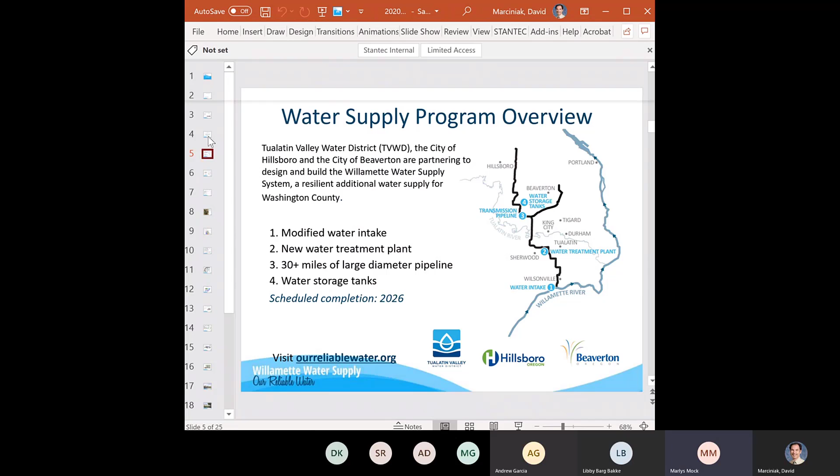So an overview of the system. At the bottom of the map, the number one modified water intake is in Wilsonville. That's where we're going to draw the water from the Willamette River. There's a new treatment plant being planned. That's the focus of our meeting tonight, just east of Sherwood, the number 2 on the map there. About 30 miles of large diameter pipeline, much of it 66-inch in diameter. And then 2 water storage tanks we're building on Cooper Mountain in general, about number 4 on the map, all to come online in 2026.

So the water treatment plant that we're talking about tonight is located within the Tonquin employment area in Sherwood. We're going to initially produce up to 60 million gallons per day with a full build-out capacity of 120 million gallons. Again, the water treatment plant will use the same water source that the Willamette River Water Treatment Plant in Wilsonville utilizes currently. And construction is anticipated to begin as early as next fall, running through 2025. And again, the system to come online in 2026.

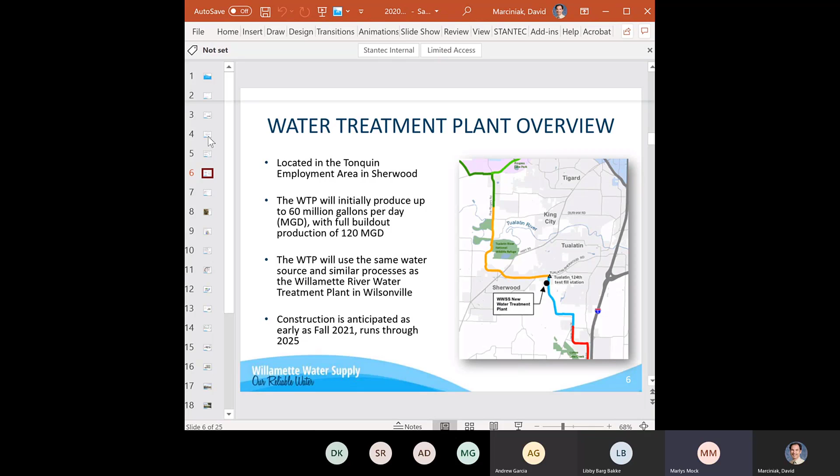So Matthew is going to take over some additional details of the project at this point. Matthew? Sure, thanks, Marlys. So I'm going to talk a little bit more about the water treatment plant site and the water treatment plant itself specifically. So the site's located at the corner of Southwest Tualatin-Sherwood Road and Southwest 124th, just on the east border of the city of Sherwood. The owners purchased some land there that totals about 98 acres, around 100 acres. The water treatment plant site will occupy the south part of that property.

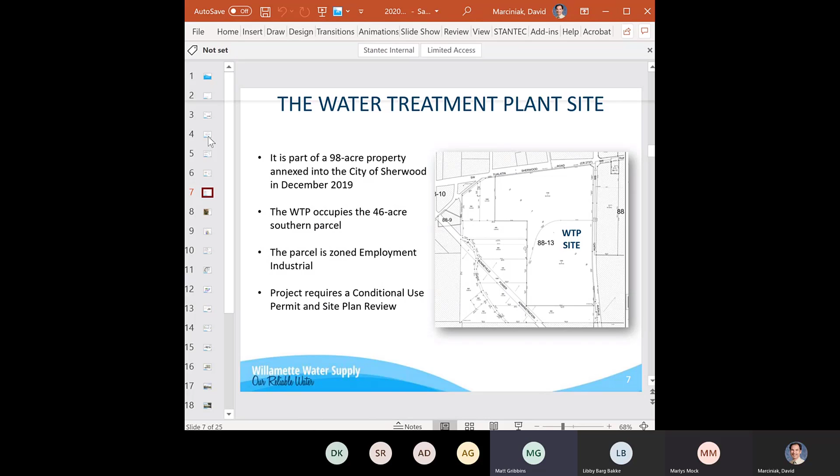We'll see it a little better on the next slide, but let me finish up here. So about half of that acreage will be allotted for the water treatment plant site. The area is zoned as employment industrial, so it's sort of more of an industrial area, and the project's subject to a conditional use permit and site plan review by the city of Sherwood, and this neighborhood meeting is part of that process for the land use permit.

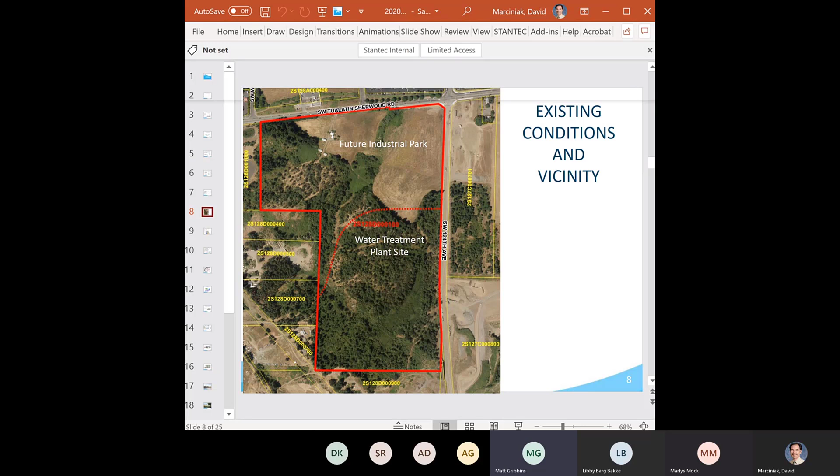Okay, next slide. This is a little bit more of a blow up of the area. The northern part of the site we are expecting to sell to light industrial, and there'll probably be some warehouses or something like that there. The water treatment plant will be on the south part of the site, the area just below the dashed line there. So we're just kind of south of that intersection of Tualatin-Sherwood Road and west of 124th Avenue. Next slide. The site, you can see here again, the northern partition that will be likely selling off.

We're conditioned to build part of Southwest Blake Street, which is the brown area that extends from Southwest 124th over to our west property line. You can see the water treatment plant in the white area just south of Blake Street.

There's some other features on the site. We have a PGE easement with high power lines that run across it in purple. There's an environmental wetland located in the southeast corner of the site that we're planning on preserving as part of the development. Then there's the blue area where we're going to have an area for the contractor to store materials and lay down things during construction, and then that area will be turned into a gravel storage area after construction for operations of the water plant.

We're pretty much staying out of the southeast corner of the site where the wetland is located, and the red and yellow areas are kind of isolated from the plant site. So other than the improvements we're going to do along Southwest 124th, we will really not be doing much in the southeast corner of the site, retaining it as sort of the native look.

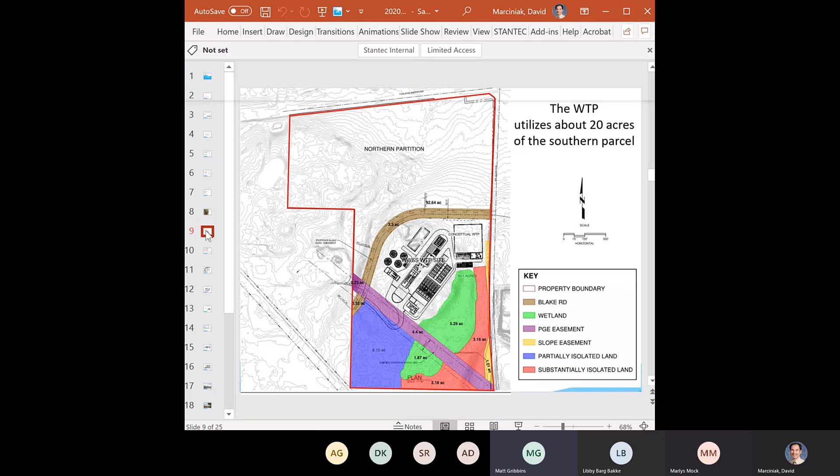The reasons we chose this site are primarily related to the adjacency to our water pipeline. It actually runs down Southwest 124th and then turns and runs west on Tualatin-Sherwood Road, so it's in close proximity to the pipeline that'll feed the plant and the pipeline that'll take water from the plant. Also, it's a site with a lot of rock, which is really stable for water plant construction. One of the goals of the program is to make this a resilient water supply that'll withstand an earthquake, so it's important to us that it be founded on good stable rock, and that's one of the attributes of this site.

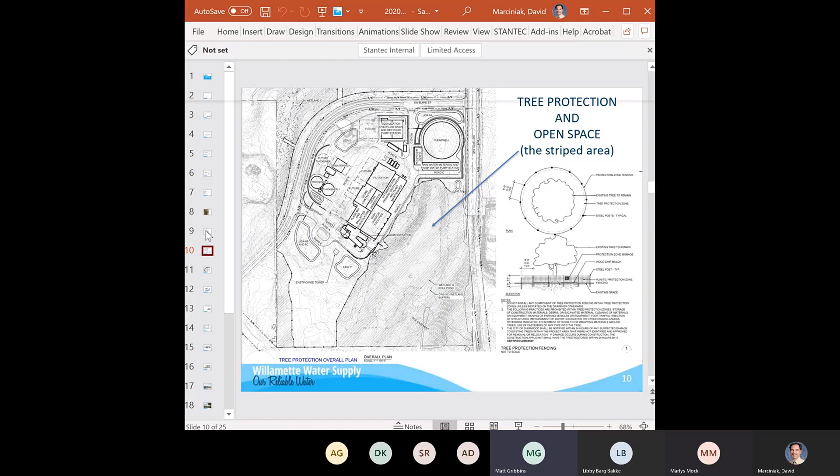This slide shows again the water treatment plant, a little more current version of the layout, but essentially in the same area. In the lower right-hand corner we're showing the preserved area where that wetland is located, and also some buffer zones on the west side of the site to buffer it from adjoining properties. It doesn't show it here, but we're also providing a buffer at the south end of the storage and laydown area I talked about before.

Next slide. Okay, so this is the blow up of the water treatment plant site. Like I said, our pipeline comes up from the south along Southwest 124th and will enter into the site on the east side.

Actually, can you go back to the previous slide? Just a couple other things. So again, you can see Blake Street here. It sort of borders the water treatment plant site on the north and west side.

We'll have a connection into Southwest 124th Street, shown in the upper right-hand corner of the slide, and our entrance to the plant is down at the lower left side. You can see where the gray road comes into the plant there. Our administration facility and public-facing areas are located on the south side of the site—we have parking down there, our administration building, and some public features we'll talk about in a couple of slides.

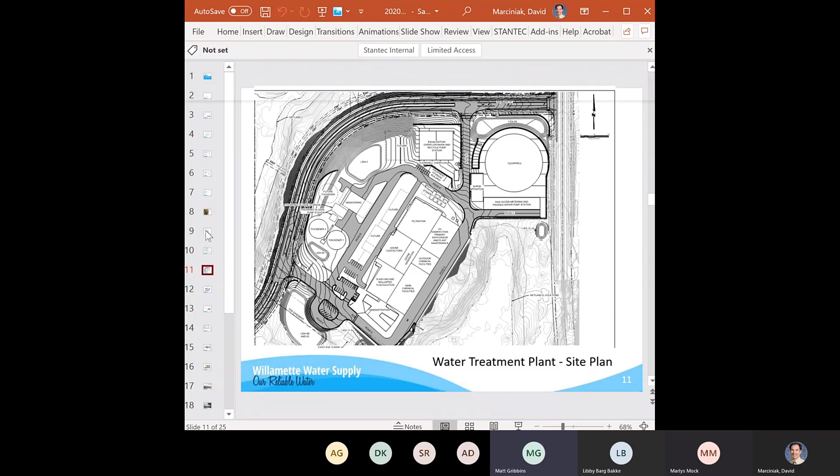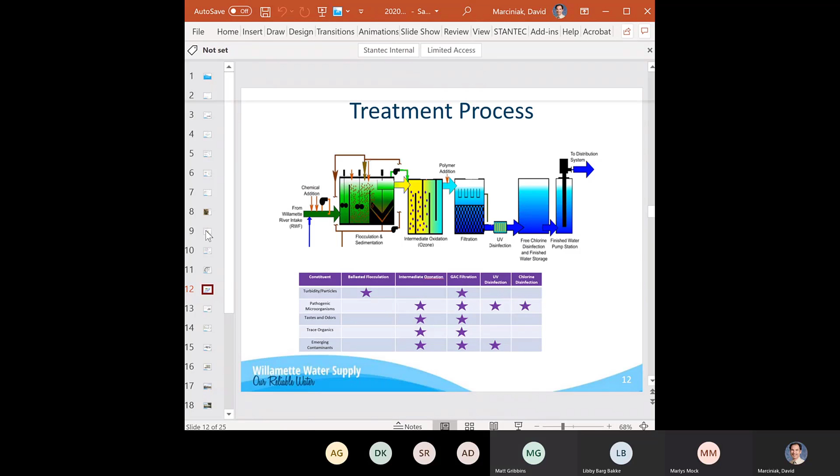Like I mentioned earlier, we have some public access amenities located down at the south end of the site where we have our admin building. We have a forest viewing platform that will provide an overlook into the wetland area. We anticipate some educational signage there to talk about the wetland.

It's a significant feature they call a kolk pond, a significant wetland feature in the area, so we'll probably have some things there talking about that. The whole water plant itself will be accessible for educational programs, so if tours are planned, they can bring them in. We have space at the south end of the site to receive those tours, and plant staff would show them around the site and talk to them about the treatment process. So this is the public-facing area at the south.

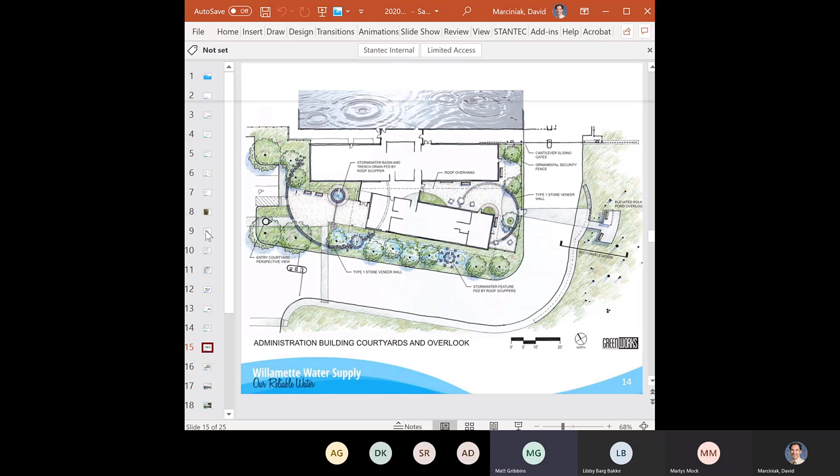I've got several slides here that show the various views of things around the site, so you can get a feel for the architecture and the landscaping.

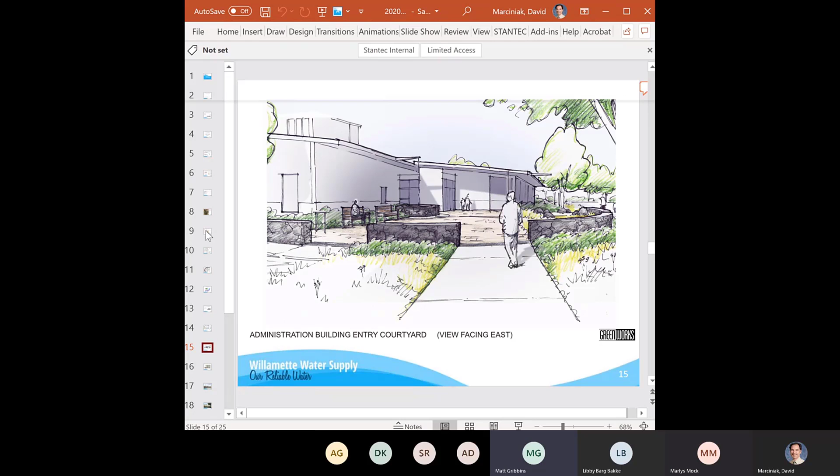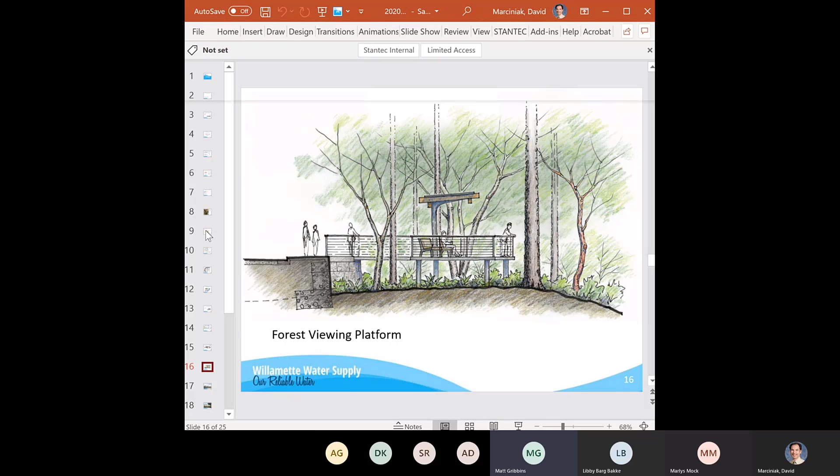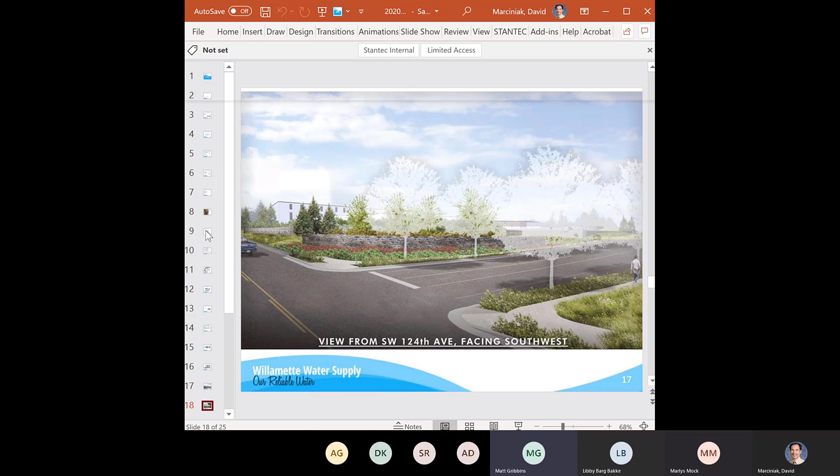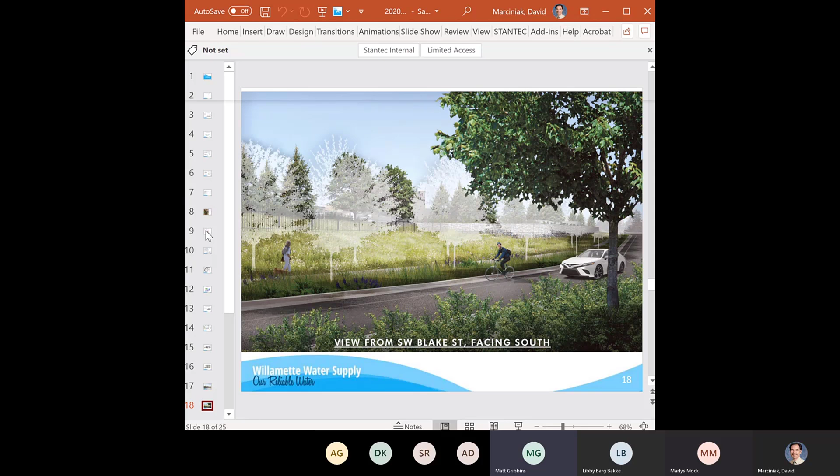The next view is as if you were driving down Southwest Blake Street and looking up at the plant. Again, the plant's fairly heavily screened from the road, so you see a lot of the vegetation and not so much of the plant structures inside the facility.

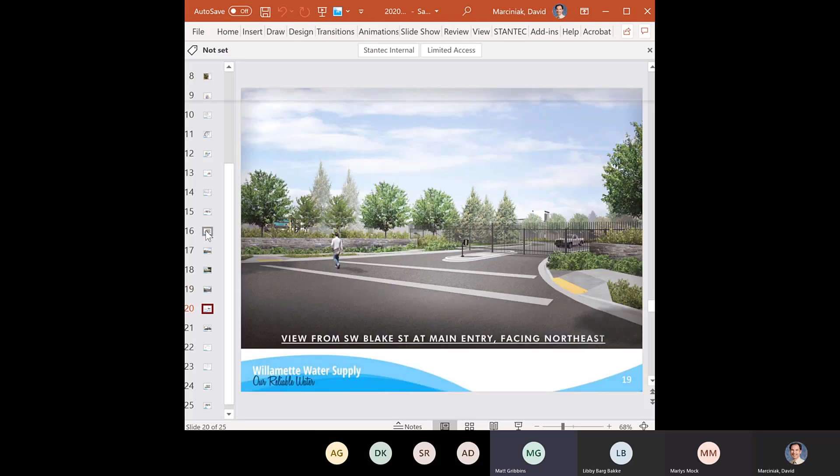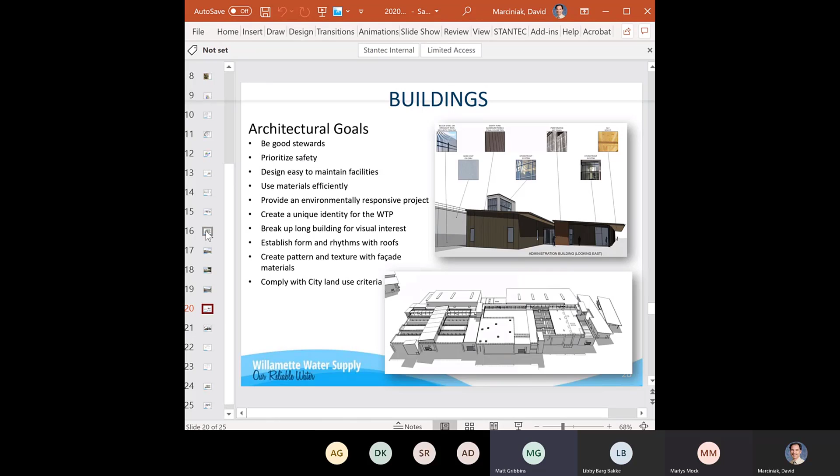The next couple slides will talk about architecture. We really tried hard to make this water plant fit into the natural environment. You can see the goals there about being good stewards to the neighborhood and the environment, using materials and things that are safe and easy to maintain, and giving it a unique identity in the area, among other things listed there. We really tried hard to make it fit into the natural environment that was already there. The next slide shows some of the materials we're using.

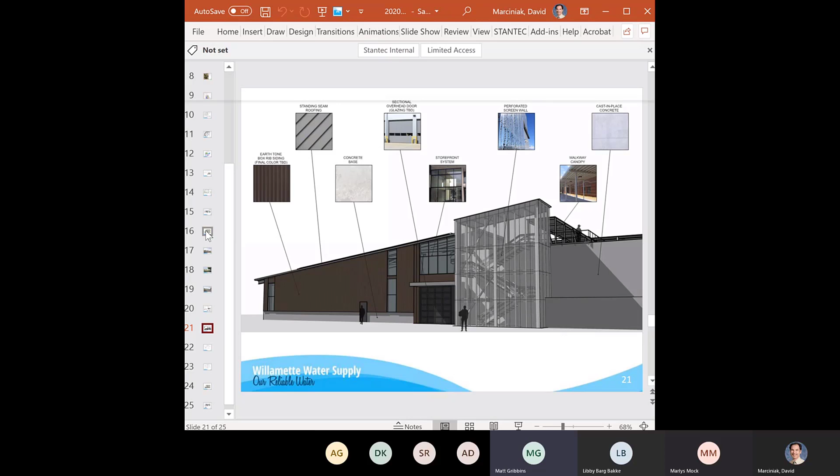This is one of the process buildings inside the water treatment plant. We've chosen more earth tone colors with browns, and we have cast-in-place concrete on the right hand side, which is one of our water holding basins. We've tried to accent those architecturally with contrasting colors at the overhead door in the middle, and lighting that breaks up the faces of the building and lets natural light into the process areas. Then we have a stair tower where we've screened the view of the stairs and given it more interest with a perforated screen wall.

Construction plans: we're currently working with a contractor to develop construction management plans. We don't anticipate starting construction until as early as the end of next year. We're working with the contractor on construction logistics that prioritize safety for both the contractor and the public. We'll have fencing, and our main gate coming to the site will be off Southwest 124th, constraining all activities and people on site, with the exit onto Southwest 124th. Along with safety, we're trying to minimize the impact of construction on the public.

We have some early activities where we have to blast some rock out to make the site suitable for the water treatment plant processes. The rock there is uneven, so we have to level it out and take some of it out to make it work with our process. A lot of that will happen early on.

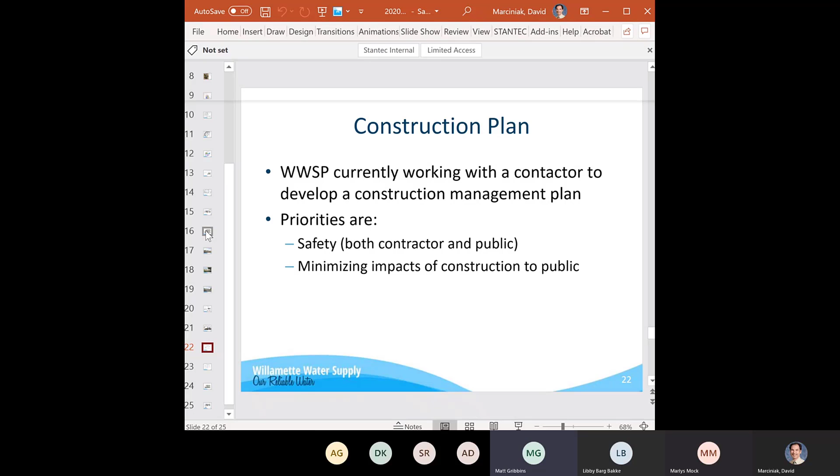Part of our objectives are minimizing dust, vibrations, and noise related to construction, and being a good neighbor to the people that live and work around here, and the other businesses. We will have truck traffic coming in and out during construction, but it'll be primarily off of Southwest 124th and coming right into our site directly.

After we finish the project and it goes online, the truck traffic will be fairly minimal, with operations staff of probably 10 or so people on site coming into work in the mornings, along with some deliveries of the various things needed to operate the plant, and hauling off some residuals of the treatment process.

So for the schedule, as we've mentioned a couple of times, we will be submitting our land use application in a couple of weeks, towards the beginning of September. We anticipate going through a public hearing in the November-December timeframe, after the city of Sherwood has had a chance to review the land use submittal.

Construction is anticipated as soon as the fall of 2021, with construction primarily finishing in 2025, moving into the startup and operation of the water treatment plant, ultimately having the whole thing online and operational in early 2026.